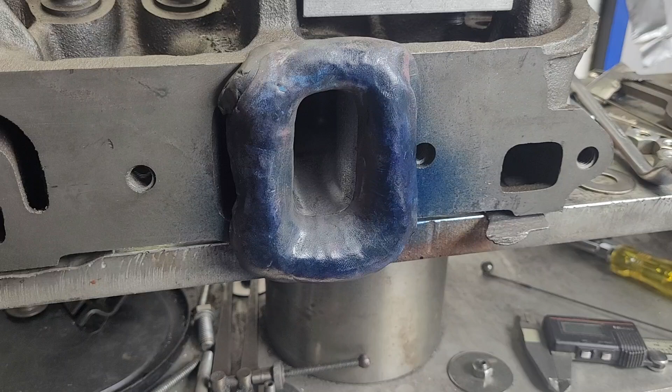Okay guys, somebody asked for a demo with the Dykem layout fluid. Sophia's under the weather, so I'm not going to do it while the bench is running.

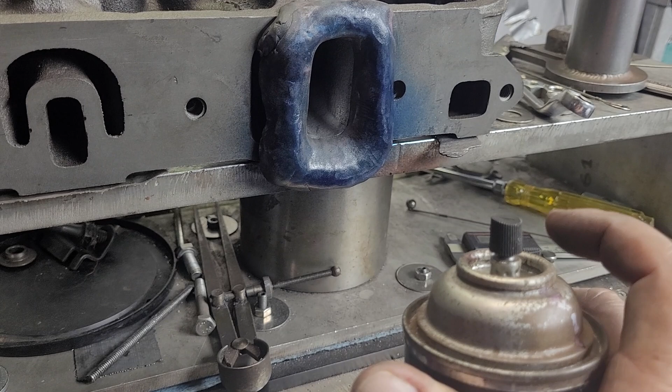I'm just going to show you approximately what I do. Try to be about 6 inches away from the radius. I lightly push the plunger to get as little spray as possible, and I literally aim for the edge of the radius. My logic is that I cover the entire port.

I watched Darren Morgan - he has 4 videos that are absolutely excellent, the kind you need to watch once in a while to refresh yourself, because he's so good. He says to be about 3 feet away when you spray the Dykem, but he's doing pro stock heads flowing 500 CFM. I'm doing ancient junk flowing 200, so I need to be a lot closer. This is the way I've been doing all the testing so far - if I change and go further away, there'll be a new learning curve.

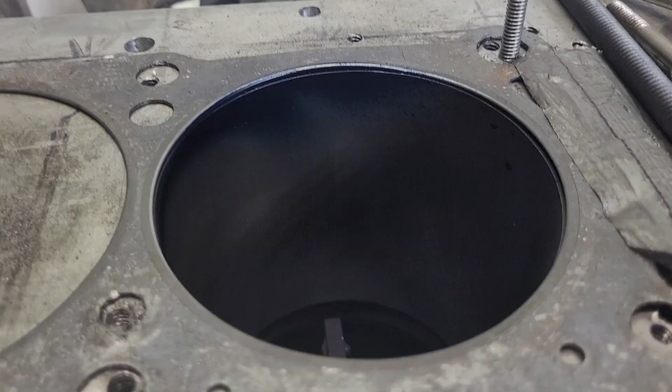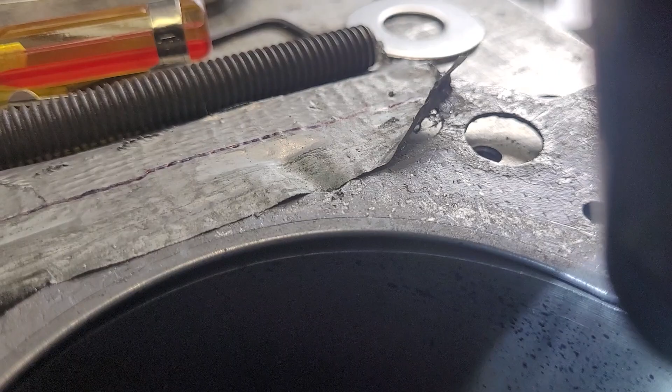Let me pull this off so you guys can see it. Before I forget, like I've been doing, let's take a look at our chamber for our last cut. Splatter, splatter, splatter - wow, we've got splatter, basically all the way around the thing.

That actually looks pretty good. I like that angle. I think that looks pretty damn good the way that is.

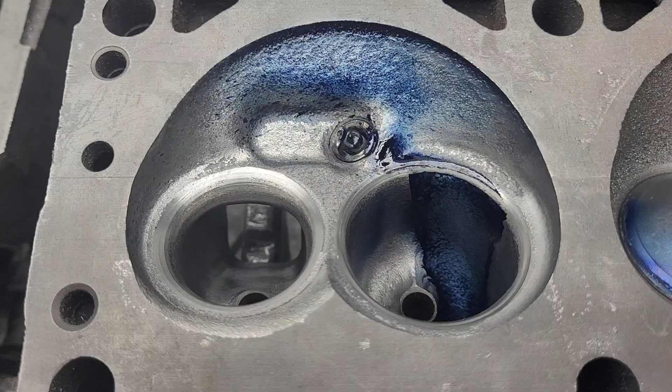Okay guys, you can see I did a cleanup on the chamber. I didn't think that was going to really do anything, but it's nice to actually see. I think we can see a little better now what we got going on. Okay, we got light now - we got some serious, nice wide liquid flow.

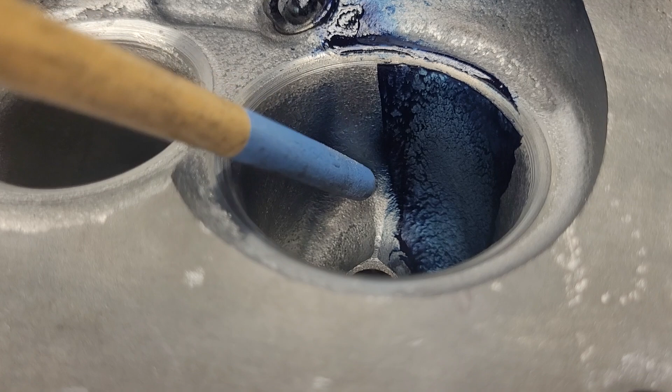One of the really good pieces I picked up today watching Darren was he said the flow coming through with the Dykem will tell you exactly where to put the vein. Now to me, it looks like this vein needs to get pushed off this way just a little bit. I should be able to do something with that, and I may just do that and reflow it.

Okay let's see, let me get some extra light on this. Hold on guys.

Valve looks pretty good, no complaints with the valve. I'm also tempted to put a stock valve with the evaporation ridge back in and see - that may actually help at this point. That's another interesting thought.

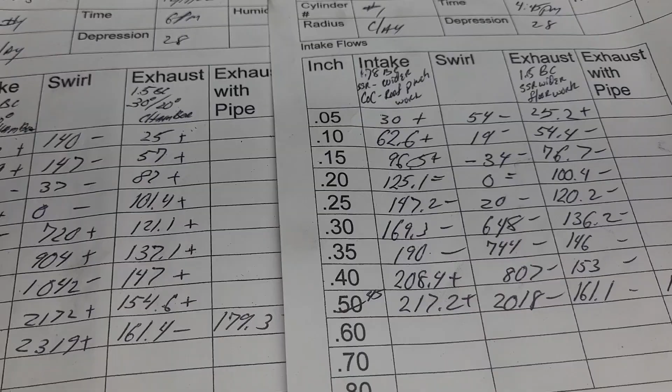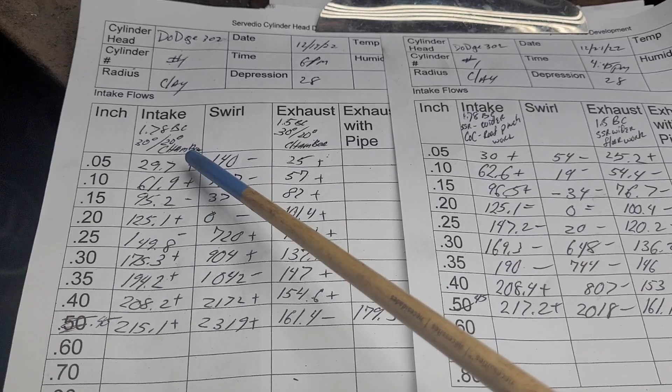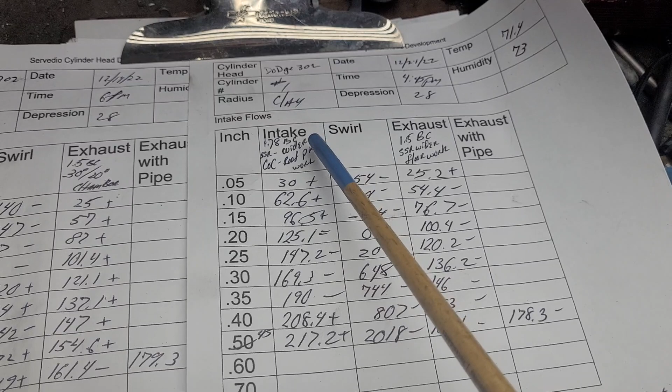So what we've got is flows you saw last time when I put a little bit wider 30 on top, did a 20 to the chamber, and radiused it in a touch. Now I did a touch wider short side radius. Center of the cylinder, I changed the roof a little bit - I had plenty of metal there and high speed, so I took a little area out and made the pinch a touch bigger where I could. Plus, plus, plus equals minus, minus, minus, plus, plus.

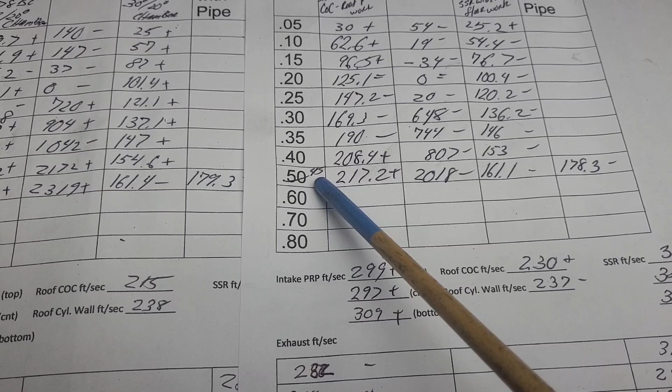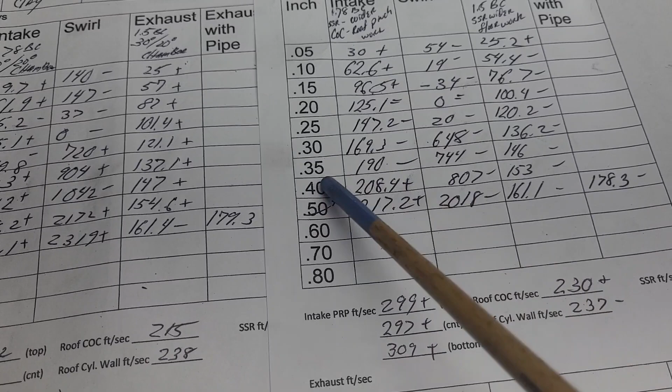217 at 0.45 lift is not horrible. I think an E7 gives me a little bit better curve than this, but I know E7 with that much air makes a nice amount of power. Then again, that would also be with a 4-barrel, not this experiment with the little tiny 2-barrel.

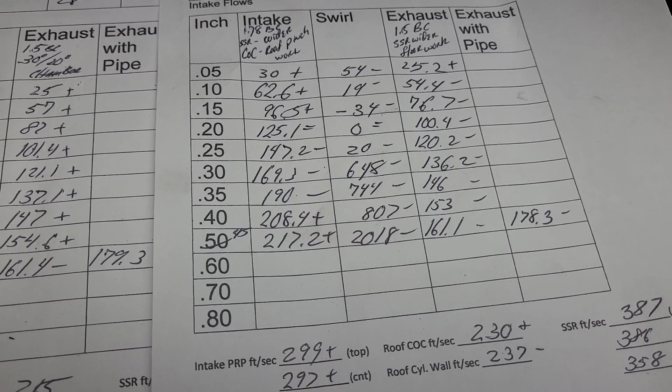I did have somebody offer to throw me a set of 1.88 valves and 1.6 valves - be sure to add retainers and locks into that, because I don't have any. That would make my life a lot easier, and I could actually flow to higher lifts instead of this botched up way of doing it. Somebody else, or maybe the same guy, offered an intake manifold. I wouldn't mind getting a head start on the intake manifold.

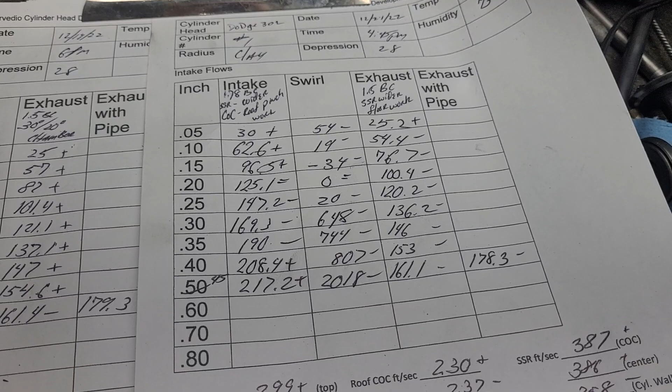I believe this project's going to have a single plane, which will really help with the tiny carb. Now, I've seen one of those intakes from the outside, but that's about it.

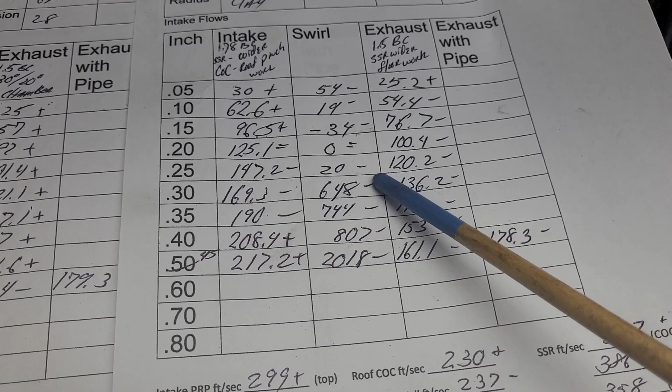All right, let's take a look at our swirl from what we had to what we have now. Minus, minus, minus, minus, minus. The swirl took a hit everywhere along here. Do we still have enough? As far as I'm concerned, we do. All right, low until it gets to a decent lift and then kicks. I like it.

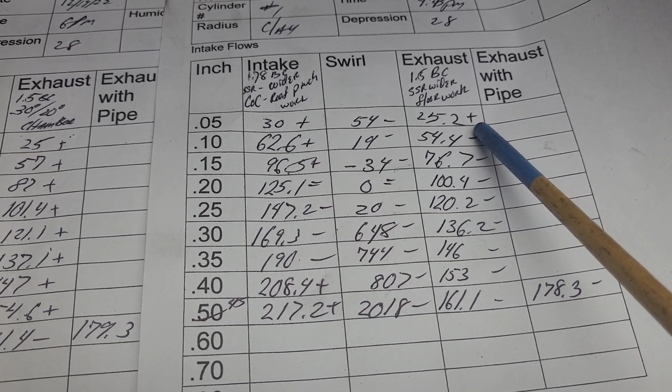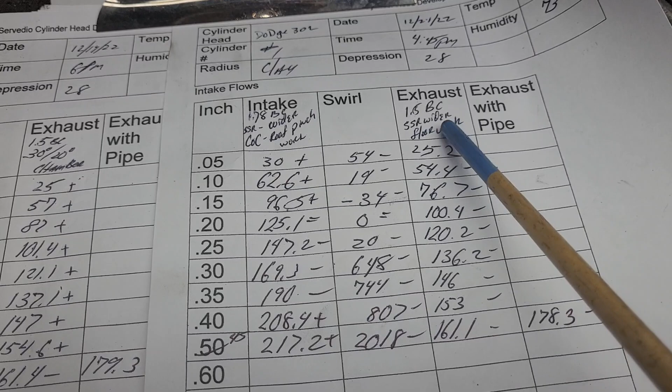Now our exhaust, I did a little bit wider short side radius. My speeds on the short side radius are actually better on this now. So I did a little bit wider, and there were a couple lumps and bumps on the floor that I took out. So we got a plus, minus, minus, minus, minus, minus. It's a loser, still a loser.

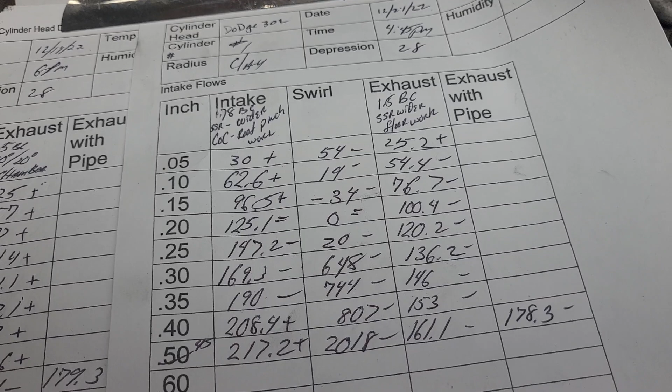So I went through that whole exhaust port with a small flow ball, and I couldn't get any information out of it at all. It's very even. No matter where you put that flow ball, it removes about the same amount of CFM. So, I'll have to think about it. I don't know what else is going on with that.

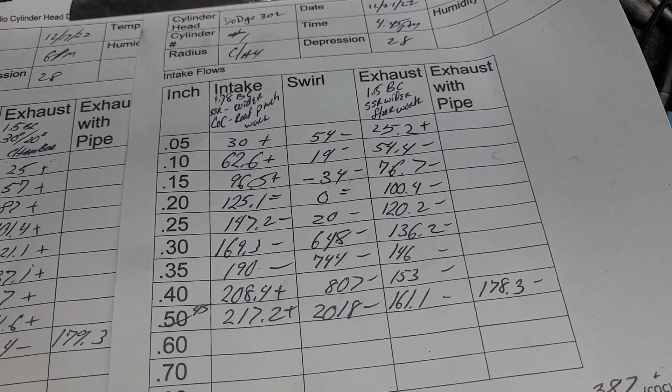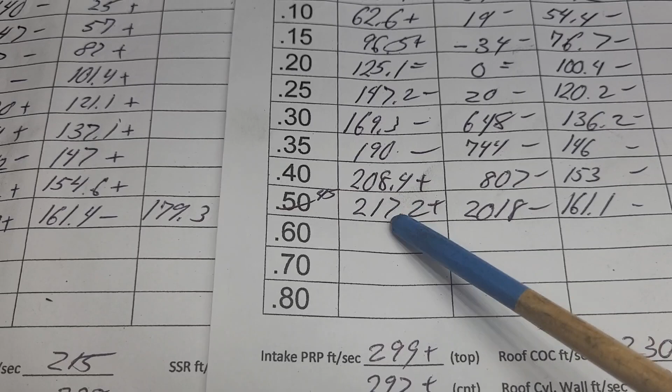Let's take a look at our pinch air speeds. Our pinch air speeds went up a little bit compared to these, because we're moving more air, right? We went from 215 to 217. Big 2 CFM, big deal, right? Makes a difference with your air speeds, though.

Roof, 215, 238, 230, 237. Went up quite a bit.

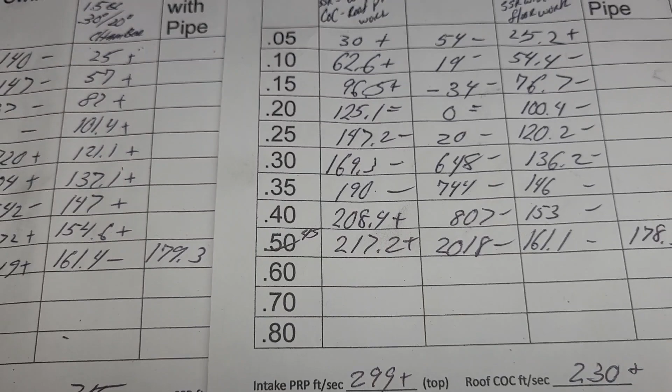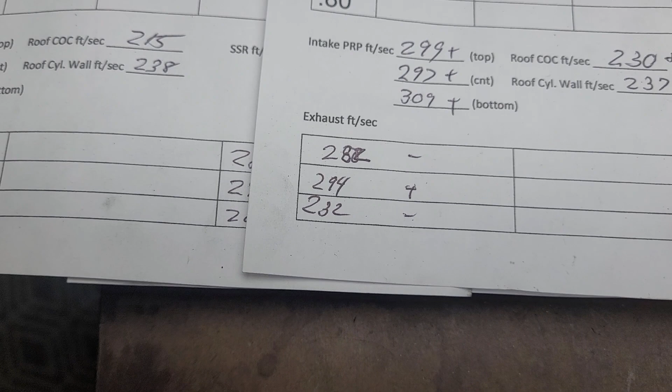Short side radius, 386, 381, 382, 387. Where are we? 387, 386, 358. Sorry I bounced the camera around, guys, it's not the easiest thing in the world to do this by yourself. Okay.

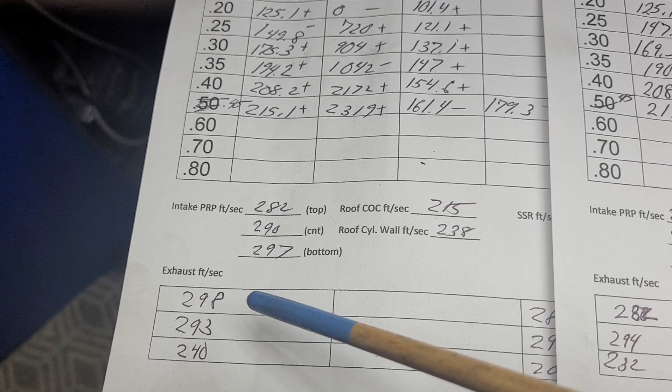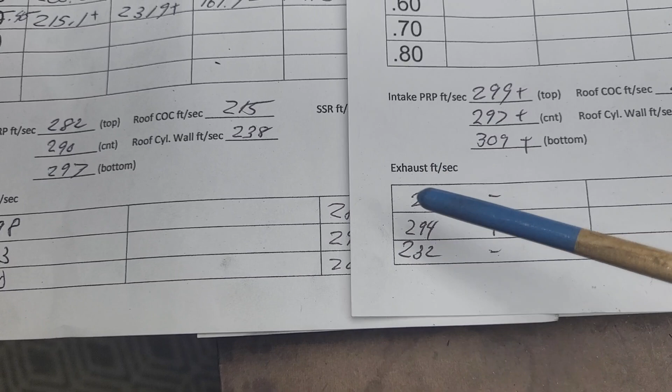298, 293, 240. 282, 294, 232. Now, this is on our exhaust, so we got a minus, a plus, and a minus. Yeah, that's a step back. That's why we got less, right? So I need to look at that.

In reality, the bowl is too big for that size valve. If I stuck a 1.6 in there, I bet that exhaust port would pick right up. A 1.6 with a nice radius, I bet that exhaust port would be banging. Okay.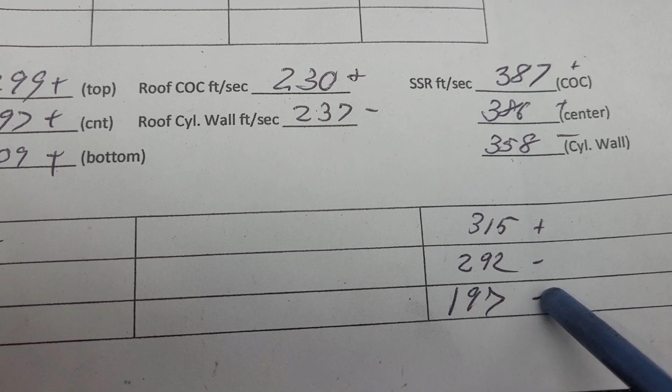Alrighty, let's take a look down its throat. All right guys, do you notice a problem with that port? Yeah, I forgot to clean it before I flowed it.

Don't ever be in a rush to try to get this stuff done fast, guys. It takes a ton of time. But obviously, that crap in the port will make a difference in how your air flows.

Okay, but as far as our liquid flow, I'm pretty happy with that. I'm going to move that vane a little bit, and I may adjust the roof just the tiniest bit. I mean, with 230, 237, that's pretty darn even on that roof. I may let that slide.

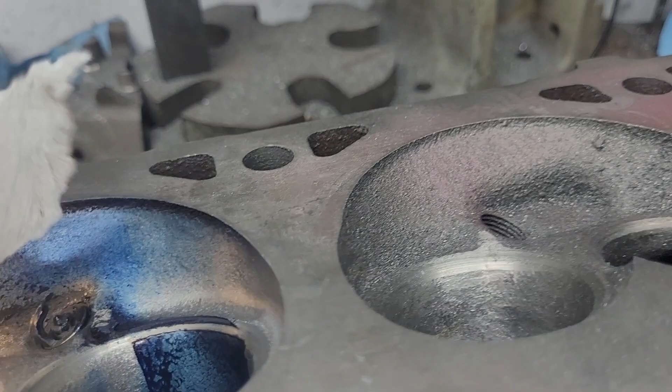And somebody also pointed out that I don't have a throat, I don't have two cuts. Yeah, it's not good. I mean, literally now what I said was, I thought - and I have to get the other head out of storage - I thought I already cut these for 202/216s years ago. It may be one head cut and one head with stock valve sizes. I don't know.

But in any case, this is a practice exercise. So even if this head winds up getting thrown out, it's not that big a deal. I think I paid 125 bucks for these, I can't tell you how many years ago. So, all right, guys.

Did I cover everything? I showed you the bore, I showed you the flows, I showed you the wet flow. I think we're good. Thanks for hanging out, have a good night.